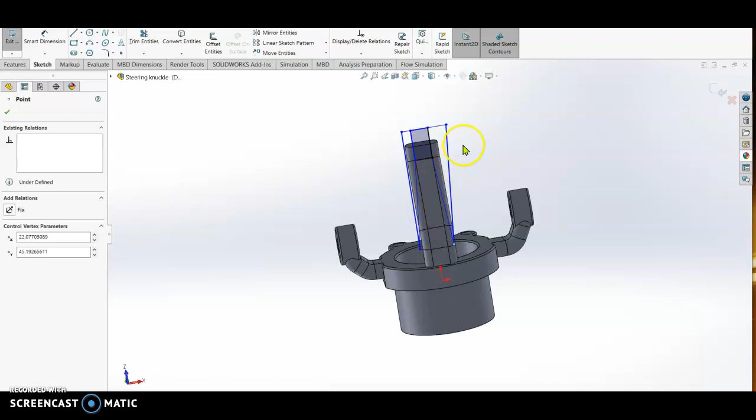This is part 2 of our steering knuckle. Okay, so as I mentioned, we have to sketch on this space. So the sketch that you're going to do is like this. Okay, I'm going to cut this area, right? So normal to. All right, so I want this area to be cut. So similarly on this area, we can put it here.

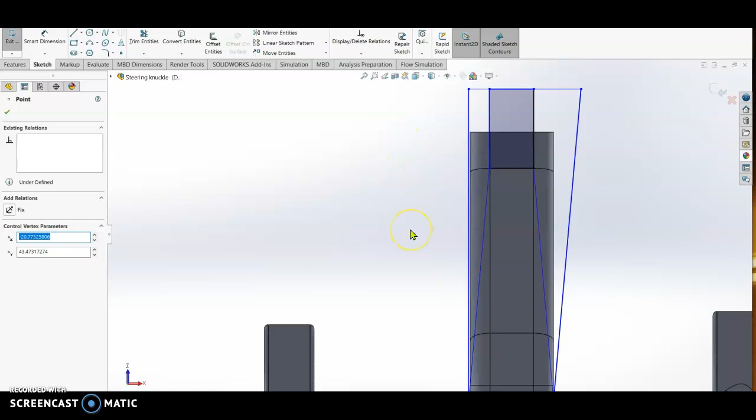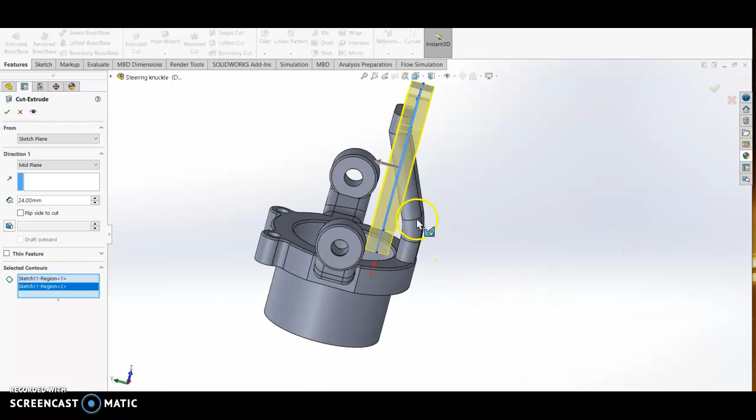Okay, so I'm going to... all right, I'm going to make it extrude cut using mid plane, right? Select this area, select this area. So let's see, we must cut. All right, check. So this is now my steering arm. I think wrong. So now my steering knuckle is like this. I cut this part.

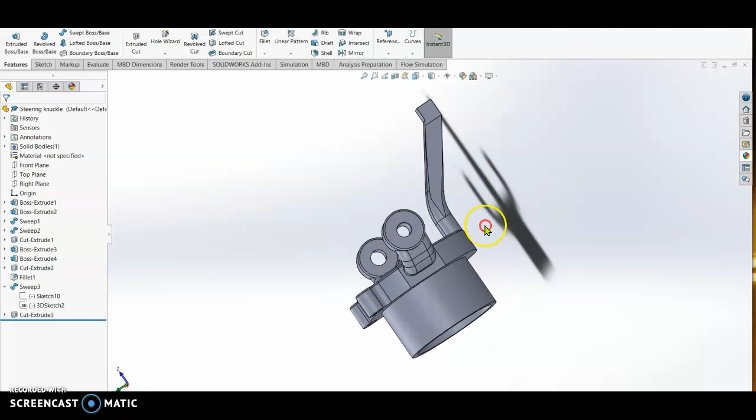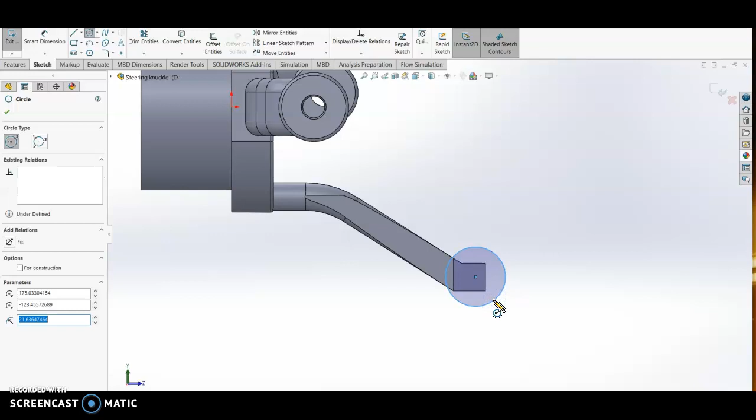So now we can sketch this part. Sketch, normal to. We can now draw the eyelet for the tie rod end. So we sketch. Okay, and sketch here. Escape. We can adjust. All right, make it smaller. Okay, features, extrude boss.

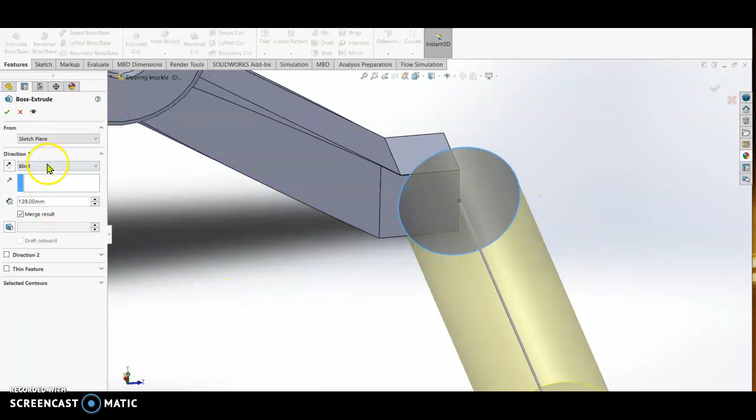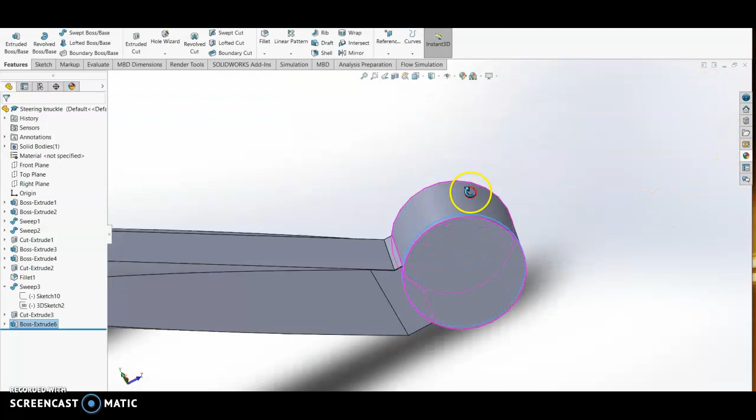Okay, we make only 2 mm, 2 mm, and then on the second direction we make it 22 mm. Okay, let's see. Oh, we make it 24. 24. Check. Alright, so this is our eyelet. Now we can make the sketch, and then normal to. We sketch.

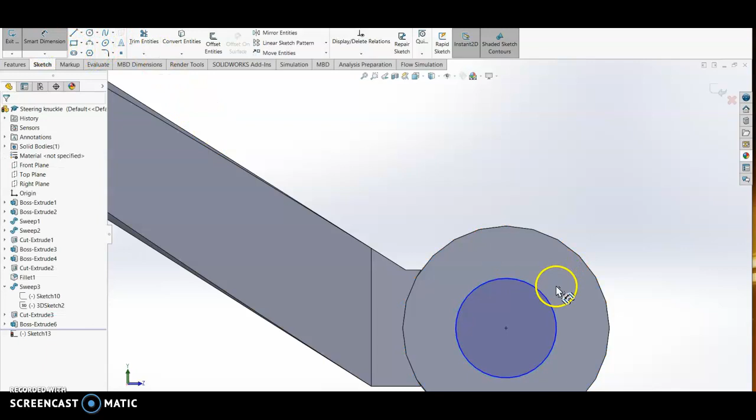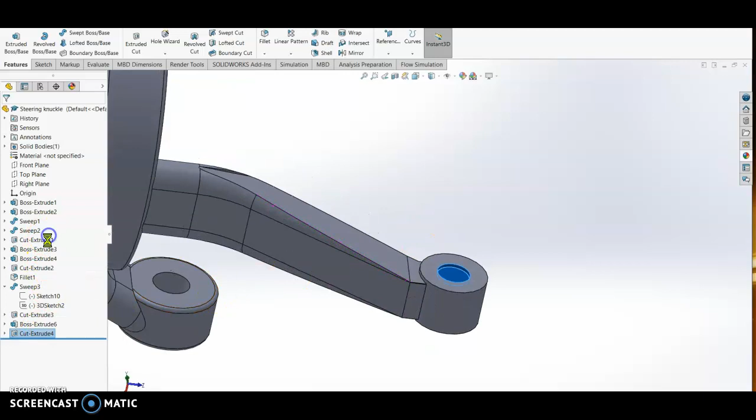We are going to cut a hole, tapered hole on this portion. Okay, smart dimension. We put 17. Enter, and then we are going to extrude cut using the 3-degree. All right, extrude cut. So, oh yeah, must cut through. Edit. So it should be through hole. Okay, check.

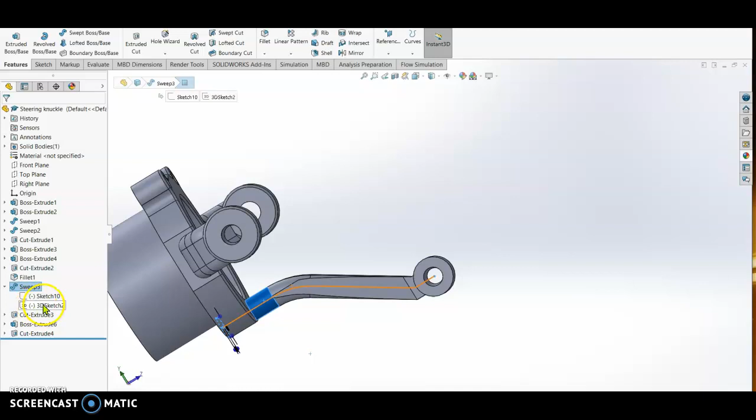Alright, so our steering knuckle is already completed. Now if this angle is not sufficient, we can still edit if we want. How to edit? Just click this arm, then we can see it's here. The 3D sketch, we can edit. Okay, it means that this angle we can still make it more. We can make it more, and this area we can still fill it if we want.

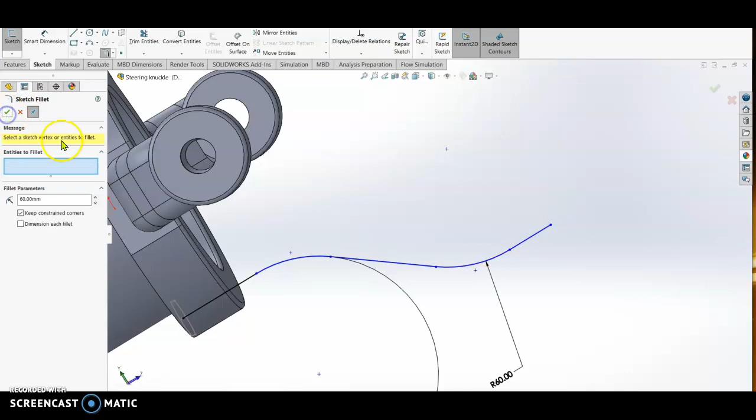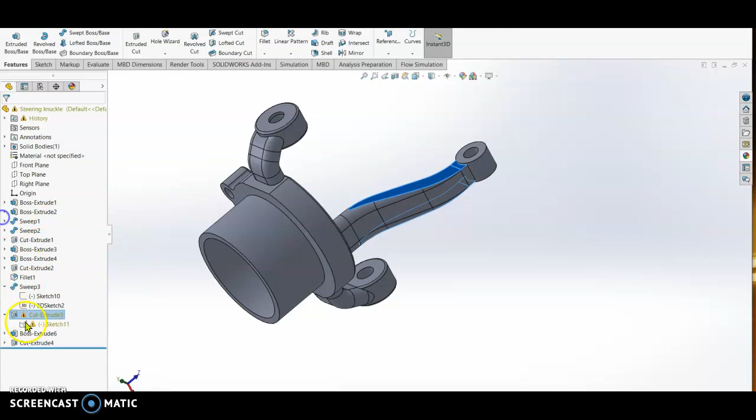Okay, check, and then nothing will change in our... close. Okay, oh, it changes already. Error, so something wrong on our extrude cut. So we edit only the extrude cut. Edit the sketch and see what went wrong on the sketch. It should be indicated by a yellow. So this is the yellow. We just delete this. So delete, and then the error will be gone.

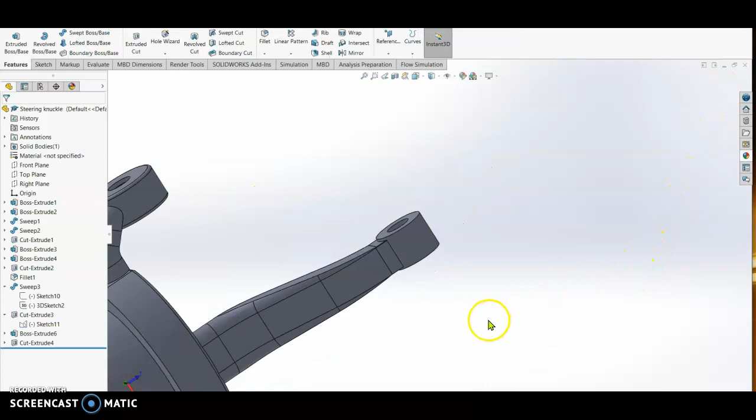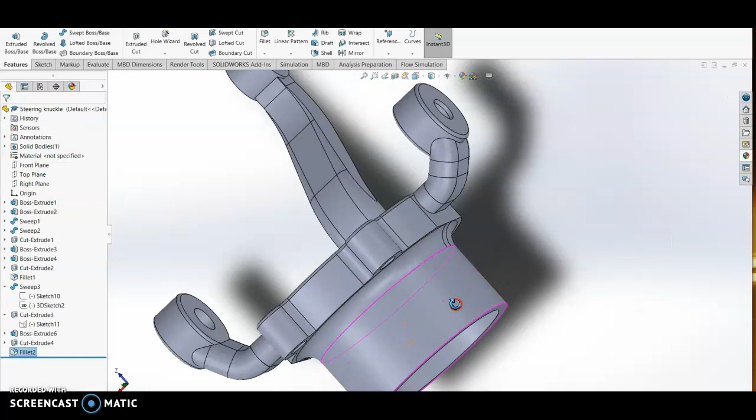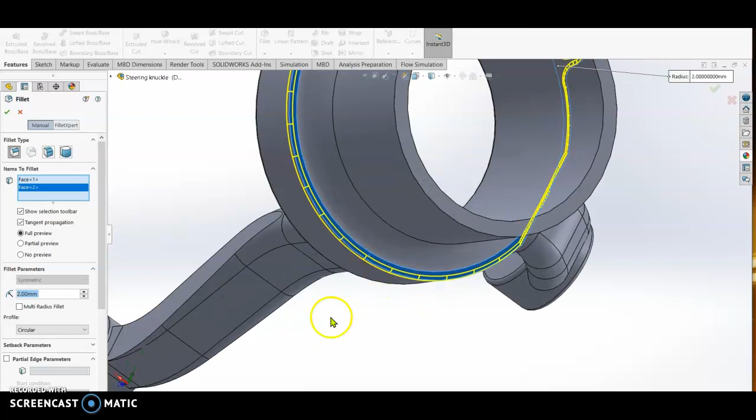So this is our steering arm, right? Now we can do the filleting. So fillet so that it will look nice. All right, we can increase for this particular area. All right, check. All right, so we can change also the material. We can still fillet this area. Fillet, maybe we put 2 mm. Okay, so similarly this space put 2 mm. Alright, on this space we can fillet by 1 mm.

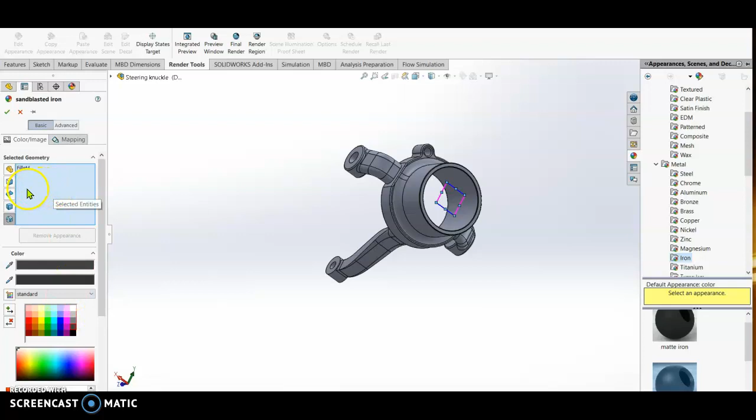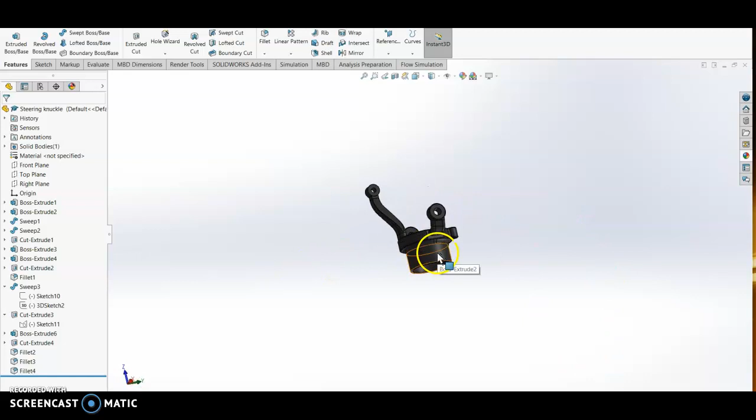Check. Alright, then we can change the appearance. We can put steel, chrome, iron, titanium. Say I want iron. Okay, color is black. Now here instead of fillet, I want this. It's not the fillet. Clear selection. I want this whole body. Yeah, check. So this is my now black. I think it's not nice, so we change to other color body. So I want it to be, okay, red. Check.

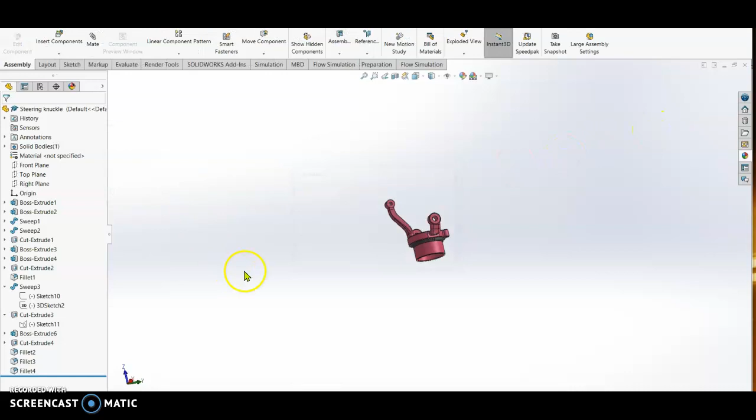Okay. So now we can close our sketch. All right. So we can now close. We have to close. We have to say yes, and then yes, and then this is already our steering knuckle. Okay. So that's it on the steering knuckle.